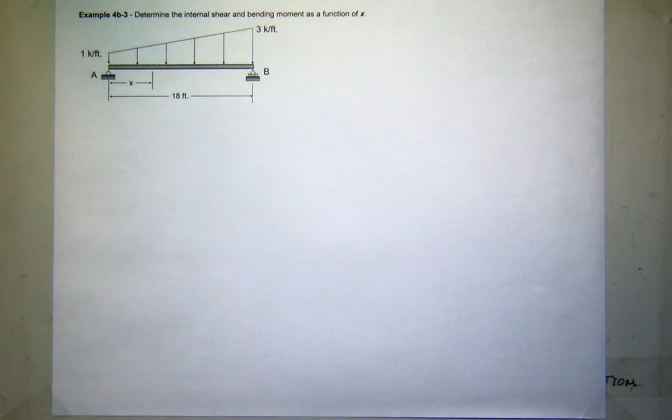So let's look at this problem. It's one of the series that we've been working on, finding the internal shear force and bending moment as a function of x. So what we like to do when we get started is imagine the structure cut there, and then looking at whether you want to work the left side or the right side.

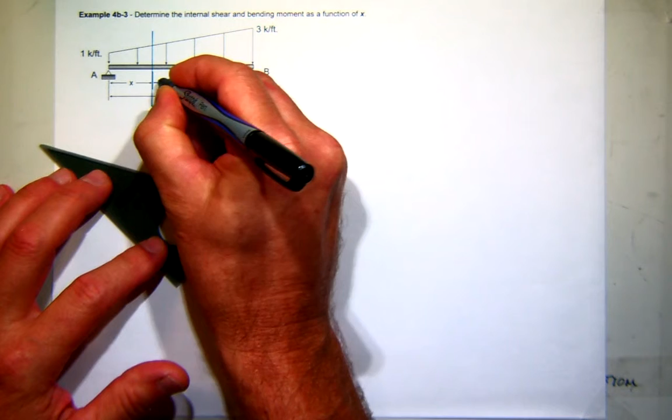I don't really see much advantage in either, except if you did work the right-hand side, all your dimensions would be what? In terms of what? What is the length of that? It would be 18 minus x. So that just makes it a little clumsier to deal with. So I think the left-hand side is the one I want to work on.

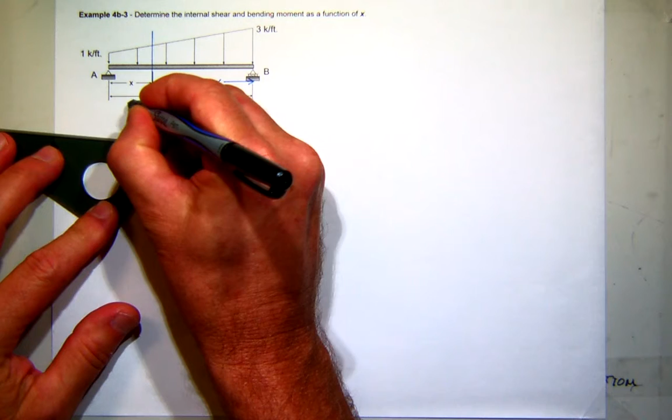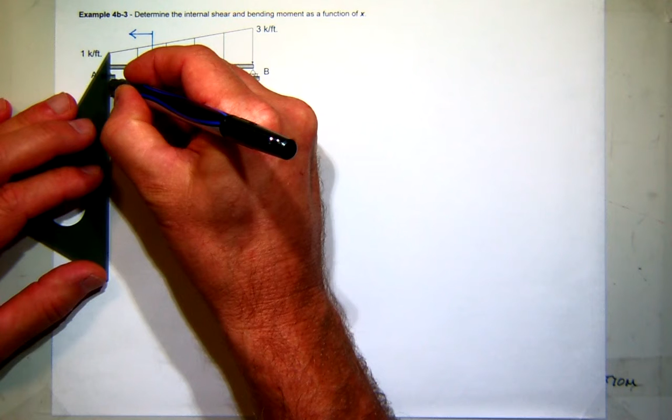We could do the right-hand side and we would get the same result. Now with that in mind, then really all I need are the reactions at A. I don't really care too much about the reaction at B. So I'll assume at A, I have a shear force at A acting up. It's a pin, so I don't have any moment, and this is a beam, we're not going to worry about axial load. So I just have one unknown to find there.

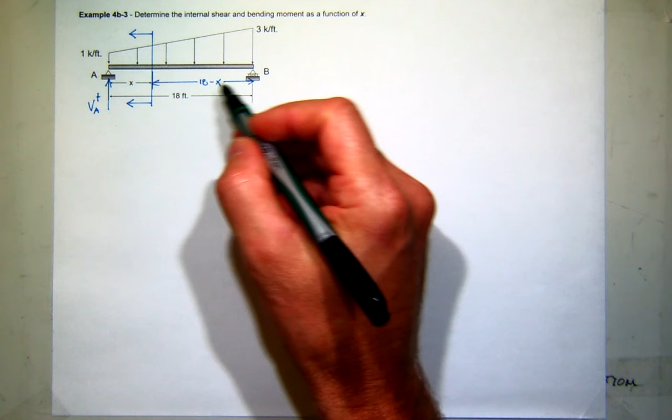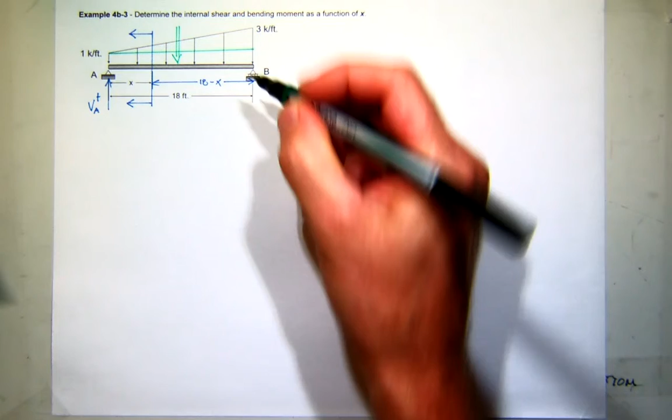So I'll probably sum moments about B to find my reaction or my shear at A. I'm going to have to deal with this distributed load. Since I don't remember the area of a trapezoid and its centroid off the top of my head, I'm going to divide it into two groups. The first one will be just the rectangular piece, which has a height of 1 and a base of 18, so that would give me a force of 18 kips.

And then my second force would be the triangular section. What's the height of this triangle right here? It's not 3, it's 2. So it would be 1/2 base 18 times height 2 gives me, oddly enough, another 18 kip force.

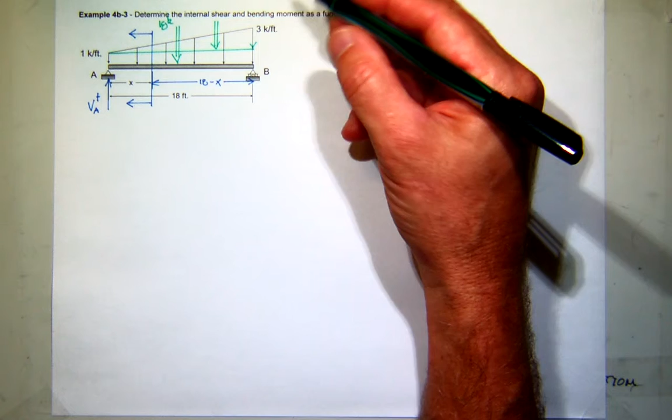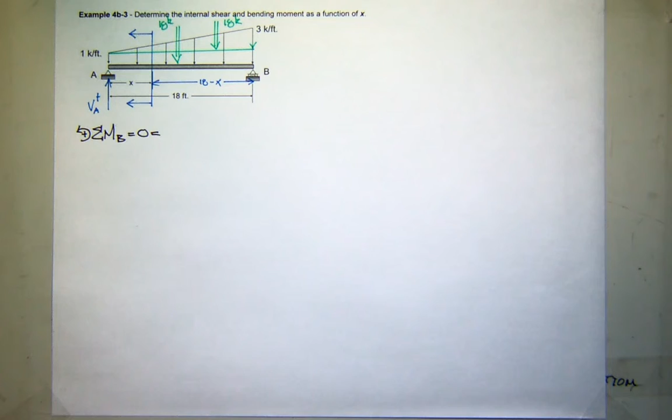So I'm going to sum moments about B, and I'm going to use, again, right-hand rule for my sign convention. Make sure everything's in equilibrium. So both these forces about B are creating what kind of moment? Positive or negative? About B. Positive. So the first force, 18 kips for the triangle, what's its moment arm?

What's the distance from B to its centroid? That should be 1/3 the distance. 1/3 of 18 is 6. Then I get over to the other 18 kip force. Its moment arm is half the distance. Half of 18 is 9.

And then I get over to my shear. What kind of moment does it create about B? Positive or negative? Negative. And it has a moment arm of 18.

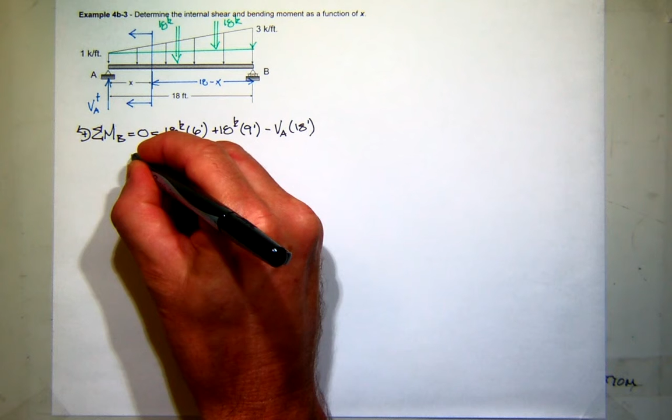So I'm thinking the answer is 15. Is it 15? Yeah. All right, good thinking. 15 kips. And it came out positive, so I have positive shear.

So when I write my equation, when x is equal to 0, I better get a shear of 15. If I want to check my equation for the shear at the other side at B, it might not be bad to have that as a resource.

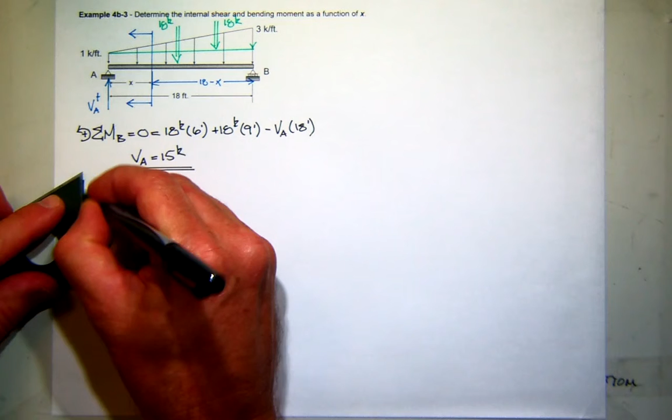Let's go ahead and sum forces here and get my reaction at B. Now to do that, I'm going to go up and assume positive shear at B. Positive shear at B is up or down? It's down.

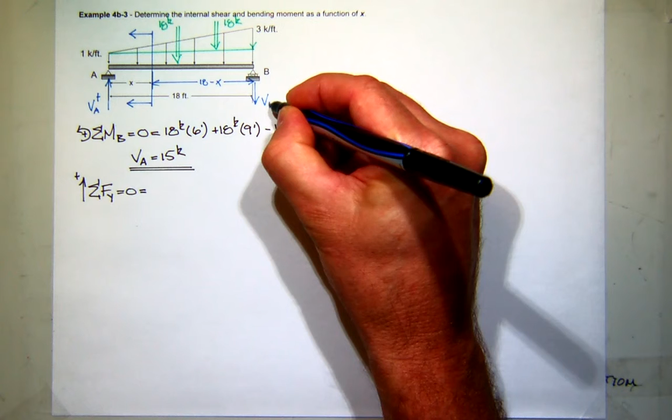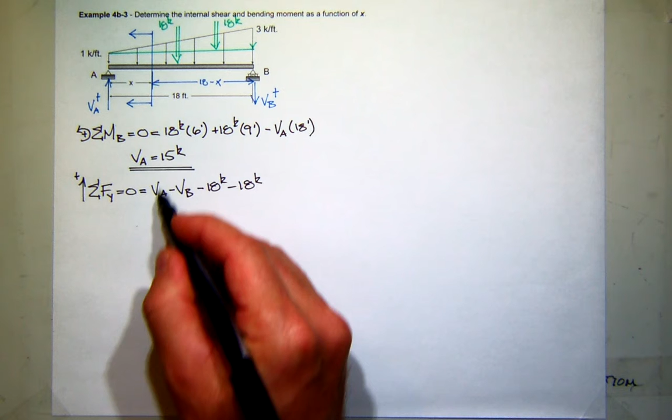So when I sum forces, I'm going to have my shear at A acting up, my shear at B acting down, then I'm going to have minus 18 kips and minus 18 kips. Of course, I know my shear at A is positive 15, so what's my shear at B?

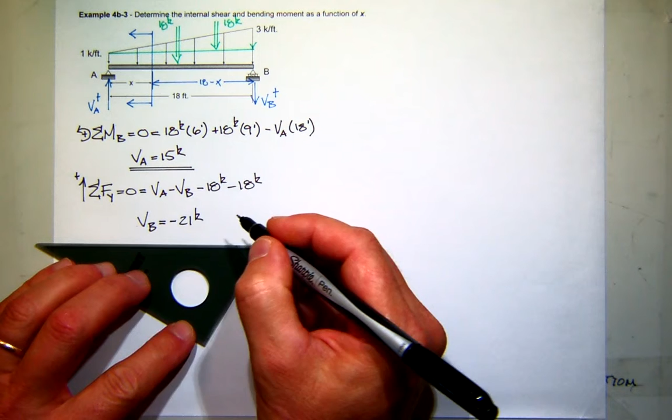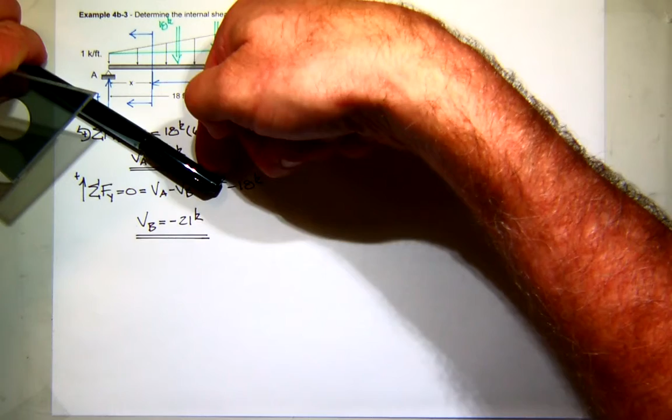Negative 21. Is that right? Because positive shear at B is down. That's the sign convention, right? Because if I imagine my body here and I push down, which way does it rotate? That's clockwise. So positive shear always rotates the element clockwise. That's the definition.

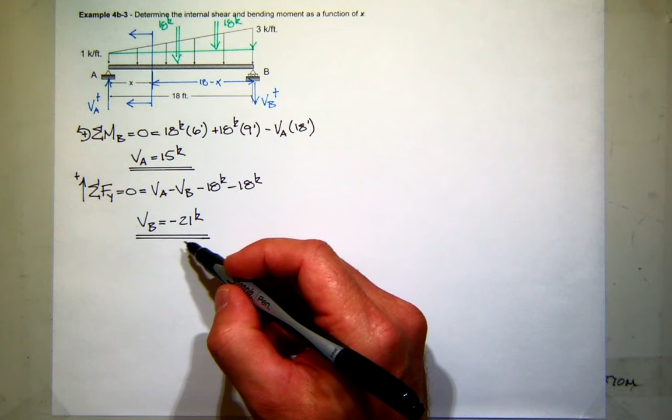So my equation for shear ought to tell me when x is equal to 0, I ought to get positive 15, and when x is equal to 18, I ought to get negative 21. If it doesn't, then something's not right.

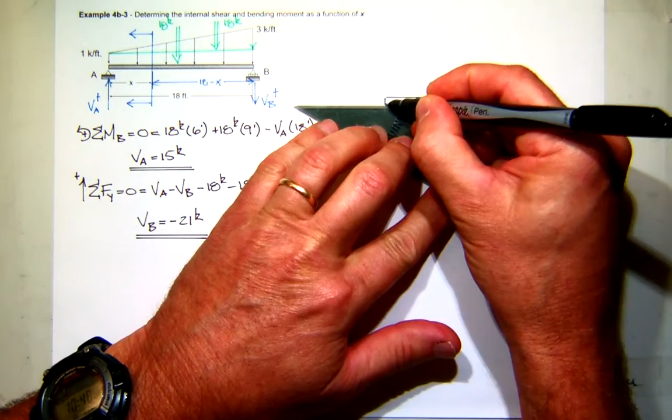Okay, so now the fun part starts. I'm going to come over here and draw a free body diagram. On my left edge, I know the shear at A. It's acting up, and it's 15 kips. And that's it. And I know this has a distance of x.

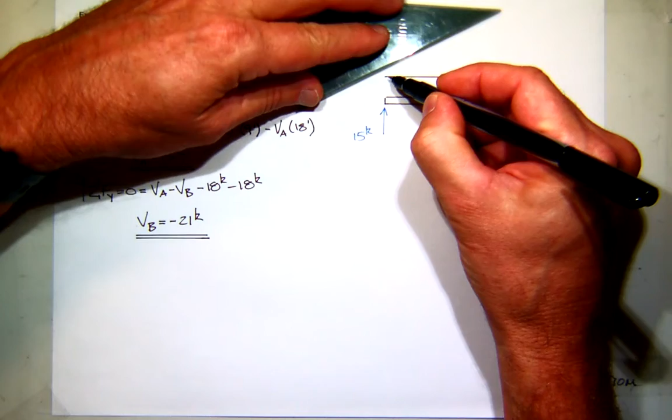And I'm going to go ahead and draw in the bits and pieces that I have. This is highly exaggerated just so I can have some room to work with.

So there's my rectangular piece, and there's my triangular piece. What's the height of the rectangular piece?

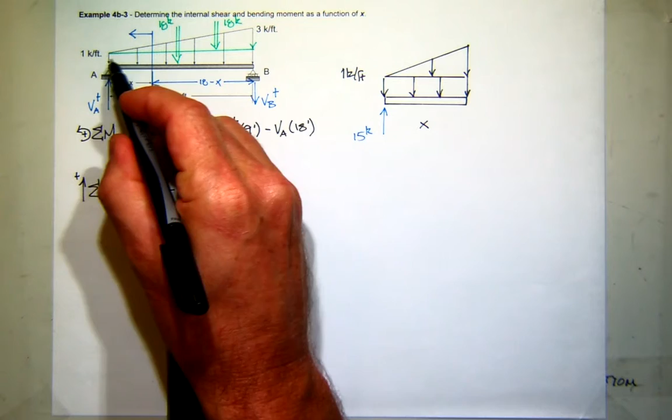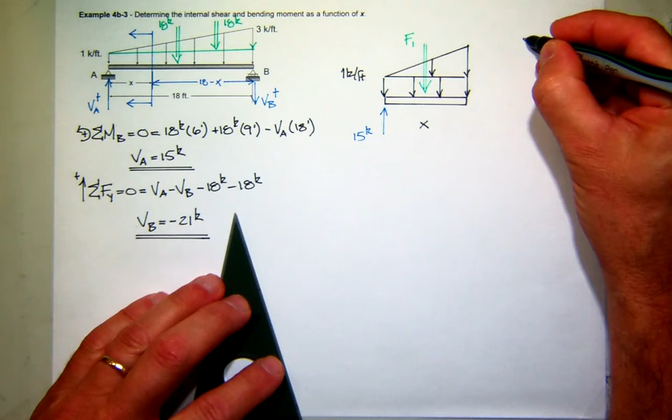1 kip per foot, and you'll notice it's a constant, so that's an easy equation to write. So what would be this concentrated equivalent force? I'll call it force 1. What would be force 1? It would just be 1 times x, so it's just x. What would be my triangular force? I'll call it F2. Well, I know it's a triangle, so it's 1/2 base times height.

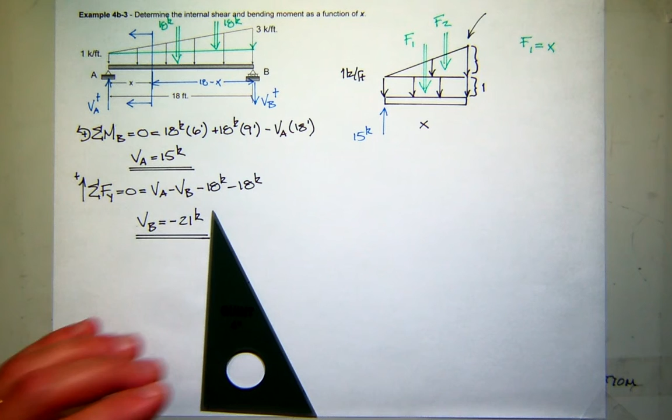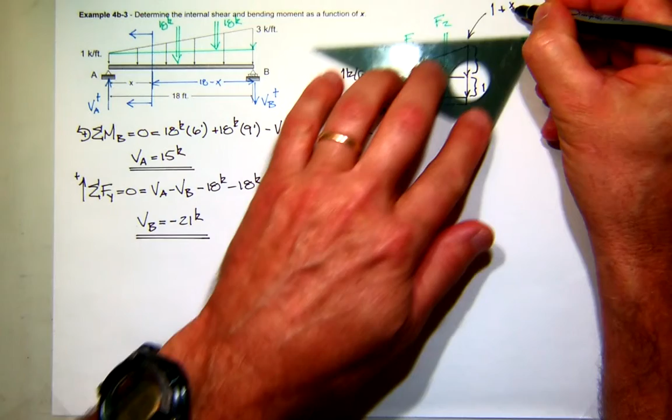My base is x. What's my height? Well, I know this little bit is 1. So what's that piece? What's the equation of that line? First of all, what's the slope? Rise over run. It looks like it changes 2 over a length of 18, so that's a slope of 1 over 9. But it doesn't start at 0, it starts at 1. So this should have an equation of 1 plus x over 9. And we can check it. When x is 0, I get 1. That's right. When x is 18, I get 3. It matches. So if this whole height is 1 plus x over 9, and this piece is 1, what's this piece? X over 9. You add them together. 1 plus x over 9 gives me the equation. See that?

Well, it got really quiet. You guys are staring at the screen hard. It's a good time to ask a question. I think. No? It's not a good time? Is the fog clearing? Maybe you weren't foggy at all. I know I was this morning. I may still be. I woke up this morning, I was walking through the house, I thought there was somebody in the house. My wife had left a hat hanging on an inside window, and I saw the hat and thought it was somebody's head. It scared the crap out of me. Then the dog started barking. It was a big mess. But nothing a cup of coffee couldn't cure.

Mr. Andrews, your gallon jug is starting to be quite adorned. Yeah. You don't have any little stick-on flashers or blinking lights or anything? I think you should develop some kind of gauge that tells you how much you've inhaled or not inhaled. You should plot that and integrate it and see what you get. I think an Excel graph of your intake would be interesting, don't you think? I think for homework I'll assign that. Oh, and you have a drink on cue. Very nice.

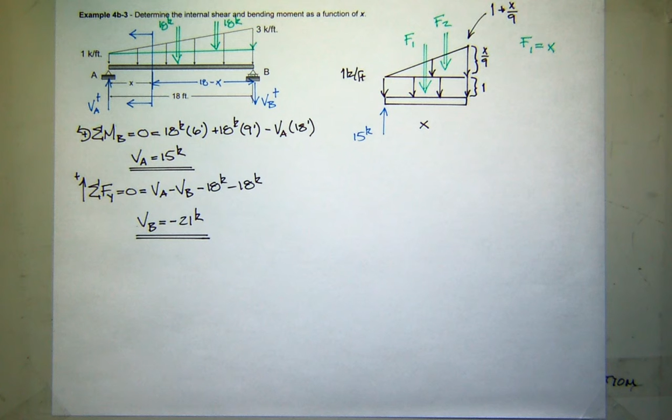All right, while I've been waiting, have you guys seen it yet? Does it make sense now? So now we just proceed. So, what is the force F2? It's 1/2 base x times height x over 9, which is what? X squared over 18.

The distance, I'll call it D1, from the cut to force 1, is what? Well, it's a rectangle, should be halfway. The base is x, so that should be x over 2. And the distance from the cut to force F2, which I'll call D2, is what? Triangle is always 1/3 from the big end, right? So 1/3 of the length is x over 3.

So in these problems, this is the challenge. If you can build the free body diagram, then the rest is just apply your equilibrium equations. Did you have a question, Mr. Sanchez? No. Oh, you're stretching? I mean, it's still the same thing we've always done. It's just you have to write in terms of x because you can't calculate. So now when you ask Dr. Palazzolo about something, and he always just says sum of the forces equal 0, sum of the moments equal 0, right? He always says that. This is why, because that's what we do. We sum forces, make sure they're in equilibrium, sum moments. It's just, it's the thing that we're making sure is in equilibrium that's the trick. Making sure that you've defined all the terms correctly and accounted for all the forces.

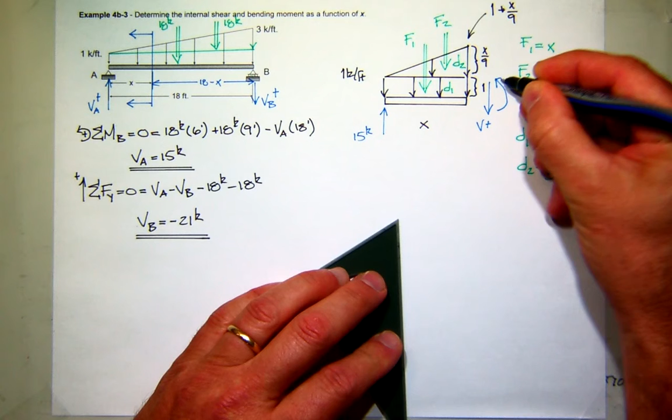So let's go back and add on that face that this is positive shear and this is positive bending moment. Things that we're looking for. Once we have that, we'll just dive in. So, assuming right-hand rule, I'm going to sum moments at that cut distance and make sure I have equilibrium. That moment with my convention is positive.

Force F1 and force F2 about the cut are positive or negative? Positive. So I've got F1, which is x, times its moment arm D1, which is x over 2, plus force 2, which is x squared over 18, times its moment arm, x over 3. And then what do I need to account for? The reaction here. And that 15 kip creates positive or negative moment about the cut? Negative. So that'd be minus 15, and its moment arm is x. So solve for the moment. I'll try to write these in their highest order first. So this is x cubed over 54. I'll start off with that one. Minus x cubed over 54. And this is x squared over 2.

And that is 15. So there's my moment equation. It should have units of kip feet. Does it work?

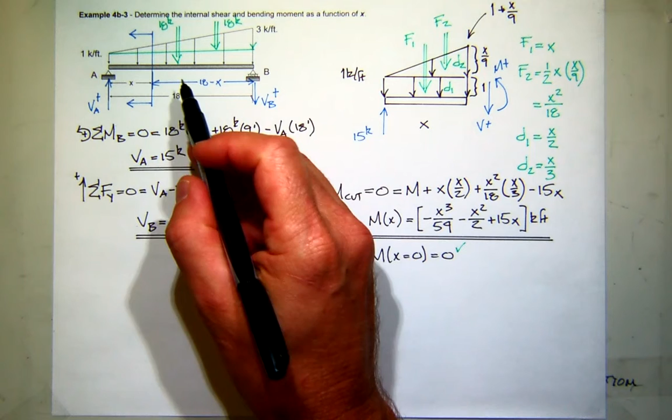Where do I know the moment in my structure? What's the moment at A? A pin, should be 0. So is the moment at x equals 0 actually equal to 0? When you plug in x equals 0, you get 0. Where else do you know it to be 0? At B. So if I plug in a value of x equal 18, is it also equal to 0?

That may take a minute for you to check.

It's like sending a text message. Do it quick, just all thumbs. You know, if I'd have seen someone working their calculator with both hands and just their thumbs back in the day, I would have thought you were from another planet. But now it's very common, right? You guys can type faster with your thumbs than with all 10 digits combined. How else would I do it? Yeah, like every other normal human with 5 fingers. That's awesome. How is that? How are they even asking? You want to have a race?

All right, so that's good. So far, so good. So now the next step will be to find out if it matches the differential relationship.

So if we sum forces in the y direction, what do we get? Well, this shear force is down. F1 and F2 are down, so F1 was minus X, F2 was minus X squared over 18, and then the reaction 15 was up.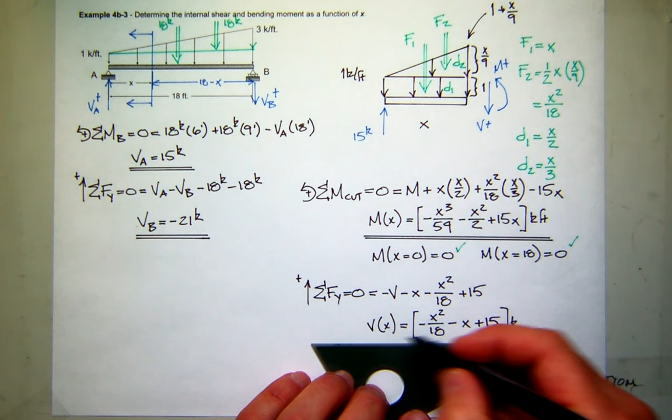Quickly, is the derivative of the moment equal to the shear? It looks like it is.

We also know the shear someplace. We know that the shear at x equals 0 is what? We solved for it, 15. If I put in x equals 0, do I get 15? Yes. And also I know that the shear at x equal 18 should be equal to minus 21 kips. If you put in x equal 18, you get minus 21.

Mr. Barnes is quickly thumbing it in. Answer is? I'm still doing the moment at 18. Anybody else get it? Yeah, yes? Excellent, I had a feeling it would. Every other indication that we were going right.

Now, a different question. Where is the maximum moment? I have an equation for moment. Where is it the maximum value? You could plot it and look at it.

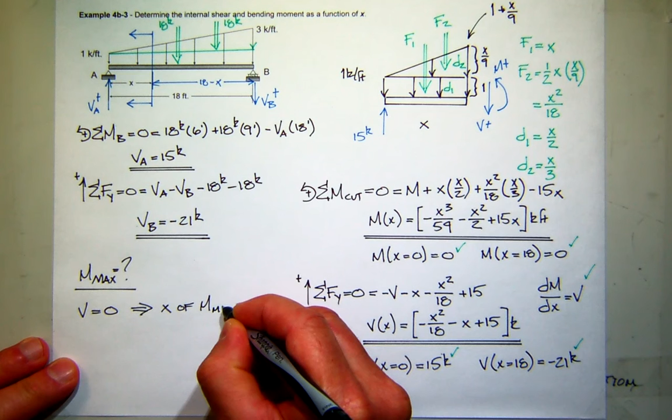So that's pretty handy. We're going to use that as we move forward, not today, but on Thursday. Knowing that the shear is 0 is an indication that you have a maximum or minimum moment. So if you're drawing a graph of the shear equation and it crosses the axis and has a 0 value, then you know where the moment's going to be max or min. That's pretty handy.

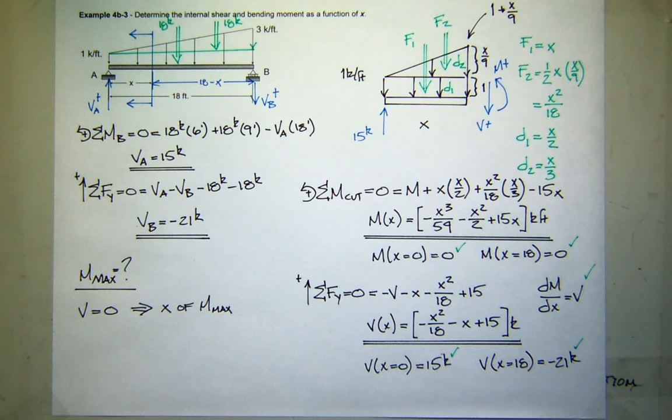Now, let me go ahead and stop this and we'll talk a little bit more. Any other questions about this one? This one took 18 minutes with all the stuff about water and everything else in there.